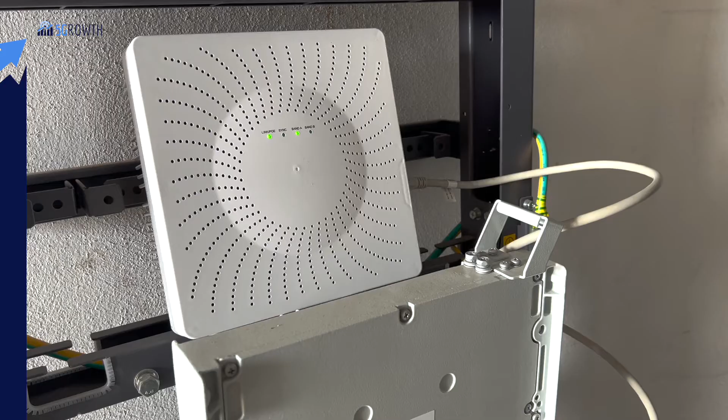The decoupling of these components is one of the differentiating features of the Aveiro pilots. The CU and the DU can be deployed in different locations or can be co-located. The RU is in charge of converting radio signals into a digital stream for transmission over packet networks.

Concerning the user equipment, multiple devices can be used, such as the Huawei 5G CPE Pro 2 used in the Energy pilot. The different components of the radio access network can be managed and monitored to guarantee optimal performance.

The 5G core is based on Fraunhofer FOKUS's Open5GCore. Open 5G core components, including all the fundamental 3GPP 5G core network functions, can be deployed as containers or virtual machines. Open 5G core follows the service-based architecture, in which self-contained, independent and reusable network functions expose their functionality through a well-defined REST interface. The O5GC command line interface enables configuration and monitoring of all the 5G core components.

The integration of 5Growth with 5G-VINNI involves the adaptation of the 5Gr-VS requests to the Sonata Slice Manager. The flow between 5Gr-VS and the 5G-VINNI's network function virtualization orchestrator follows the 3GPP standard TS 28.531.

This integration has allowed the availability of the interdomain and security innovations led by IT Aveiro, also supported in Sonata through extensions implemented on it.

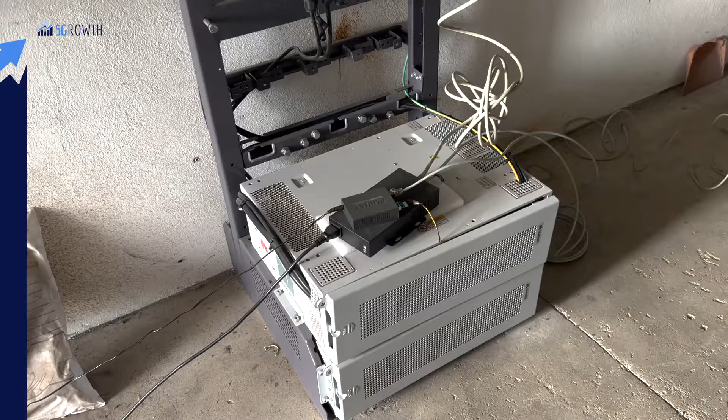The control center system is deployed in the IT Aveiro data center, connected to the 5G core through the data center network. In the first use case demonstration, we'll see what happens when an abnormal event takes place inside the secondary distribution substation.

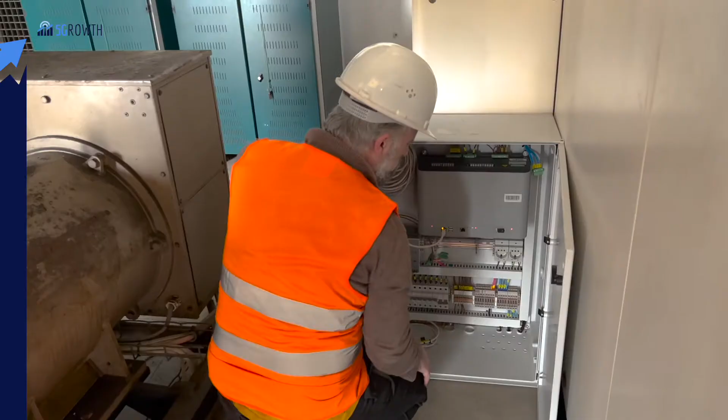For that purpose, we simulate a blown fuse event in one of the low voltage outfeeds, interrupting the current sensor reading. As the current reading is interrupted, a new alarm event shows up in the alarm list interface on the operator's screen.

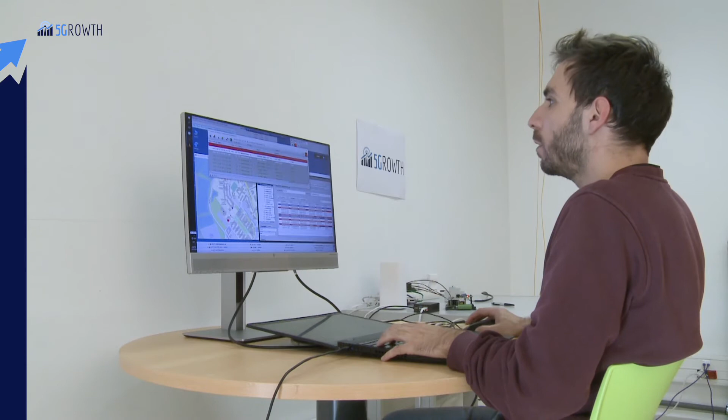Other user interfaces like floating lists or diagrams are also immediately updated with the new status. To ensure a reliable real-time operation of the network and a smooth experience for the operator, a sustained low latency on the communications network is mandatory, not exceeding 100 milliseconds.

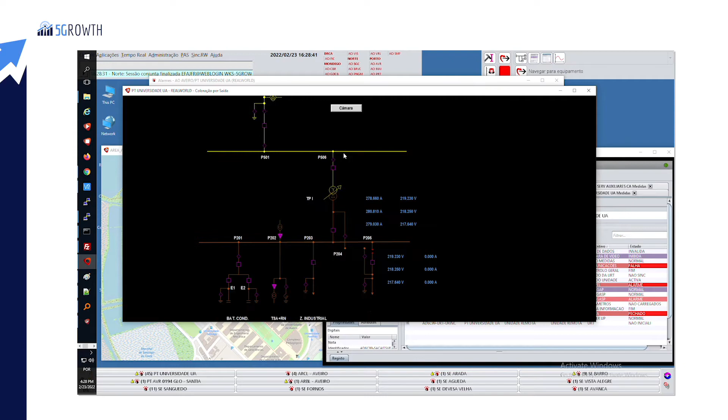The operator will then track down the abnormal event just arrived, opening the single-line diagram of the problematic substation from the alarm list entry. The diagram exhibits a set of real-time live information concerning the secondary substation telemetry, measurements like current and voltage, and signals like a blown fuse or an actuated intrusion detector.

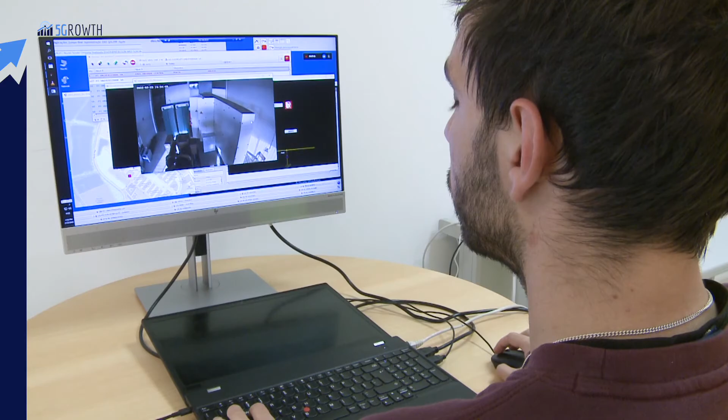The operator may open a video streaming transmitting from inside the substation to get further information about the root cause of the abnormal event. This can be particularly useful to the operator assessing what is going on inside the substation, maybe a fire on the power transformer or a human or animal intrusion.

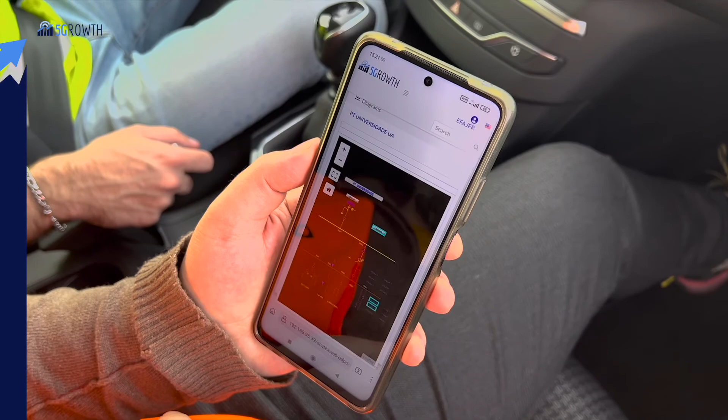He can then pass accurate information to the maintenance team on the field, saving valuable time preparing the intervention to resolve the occurrence. Meanwhile, an incident ticket will be issued and assigned to a nearby field crew to investigate the fault event. The field crew has immediate access to the work order related to the incident using a 5G mobile device connected to the 5G network.

With the mobile interface, the field crew can get real-time information from the secondary substation, such as the telemetry, the alarms, and the live video feed from inside the substation. This information helps the field crew to assess the fault in advance and better prepare to solve it.

The team can use the geolocation of the secondary substation to establish the better route to get there.

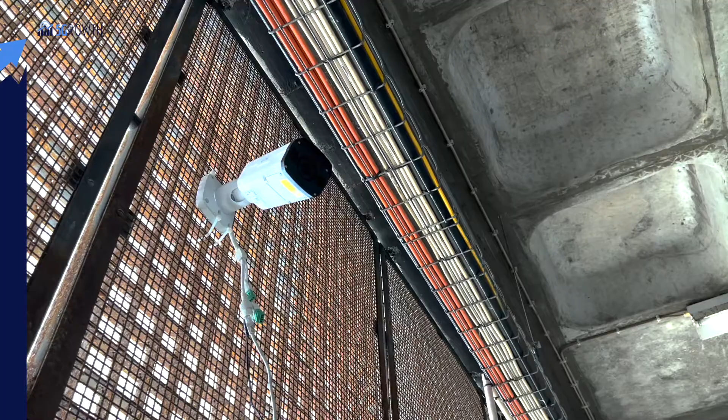When the team enters the substation, the intrusion detector is actuated. The detector signal is acquired by the substation controller and immediately transmitted to the control center, showing in the operator workstation. That blinking door is telling the operator that something requires his immediate attention.

Through the video streaming, the operator can follow the field crew actions while they investigate the root cause of the incident. This enhanced supervision of the secondary substation would not be possible with the communication technology currently deployed in the distribution network across the secondary substations. We are talking most commonly about GPRS, with very low throughput capabilities and higher latency than required for real-time remote operation.

In the second use case, the low-voltage sensors installed in the IT2 building distribution cabinet and in the laboratory electrical switchboard transmit real-time telemetry and last-gasp events to the concentrator inside the substation, which forwards them to the control center. The low-voltage sensors are connected to the substation through the 5G standalone network. These sensors and the concentrator are time-synchronized by the IT NTP server.

The low latency and high availability of the 5G network are key points to keep the low-voltage sensors timely synchronized and to ensure that the last gasp events triggered by the low-voltage sensors are transmitted as soon as they are generated and while these sensors have remaining power.

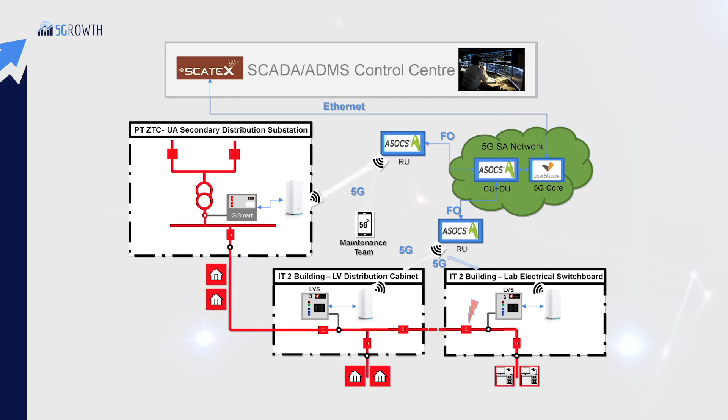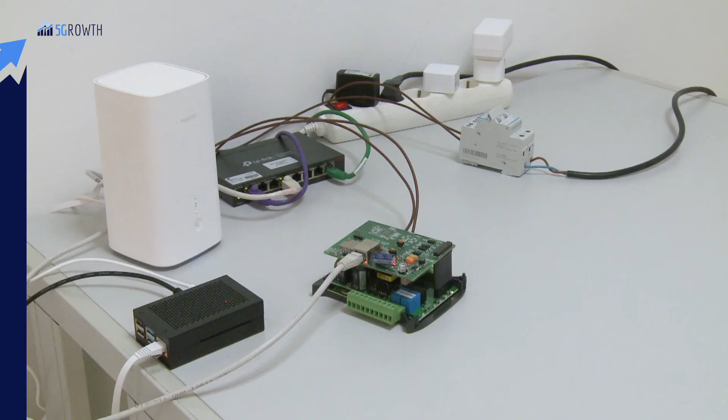In the second use case demonstration, we'll see how a power down incident in the low voltage distribution network is handled and transmitted to the control center. For that purpose, a power cut is simulated, affecting the electrical switchboard and interrupting the power supply of the low voltage sensor installed there. The voltage drop triggers the last gasp signal in the low voltage sensor.

This signal is pushed into the 5G network to be acquired by the substation concentrator and immediately transmitted to the control center over the 5G radio connection.

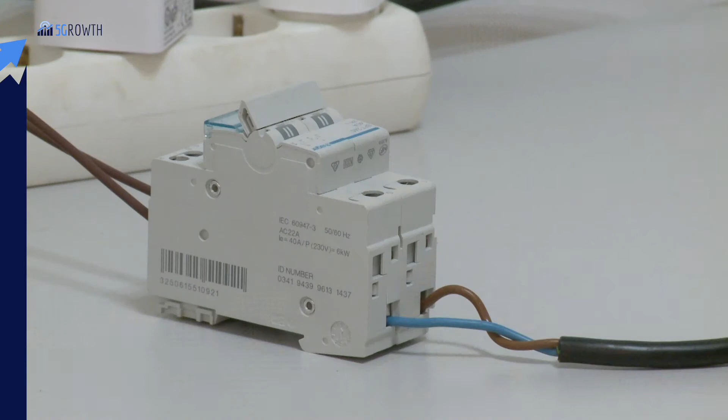We can see that as soon as the power supply is interrupted, a new alarm event shows up in the alarm list interface on the operator screen. Other user interfaces, like floating lists or diagrams, are also immediately updated with the new alarm status and the related telemetry measurements.

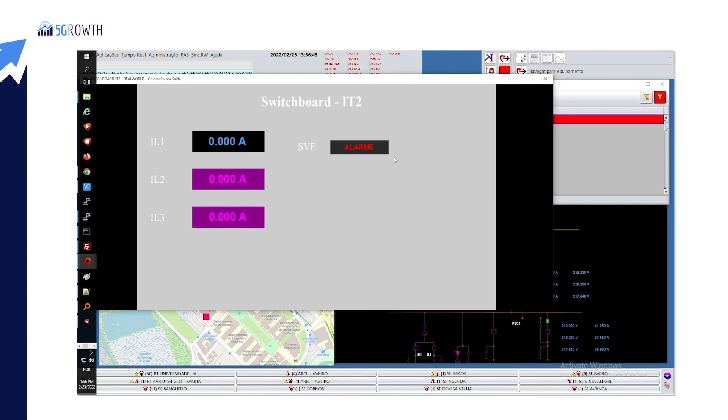The operator opens the diagram of the distribution cabinet close to the electrical switchboard and realizes that this one is still energized. The fault must be in the circuit between the distribution cabinet and the electrical board.

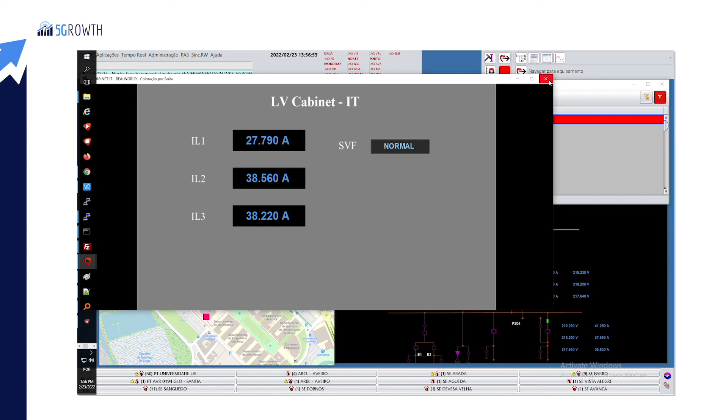A few moments after the fault occurs, the control center operator already has valuable and accurate information to pass to the field crew that will be sent to investigate and solve the problem that led to the fault.

The communication technologies currently in place in many of the metering infrastructures, like PLC Prime or RF Mesh, have limitations that prevent them from supporting large-scale real-time monitoring of the low-voltage network. The 5G provides the performance and capacity to do the job.

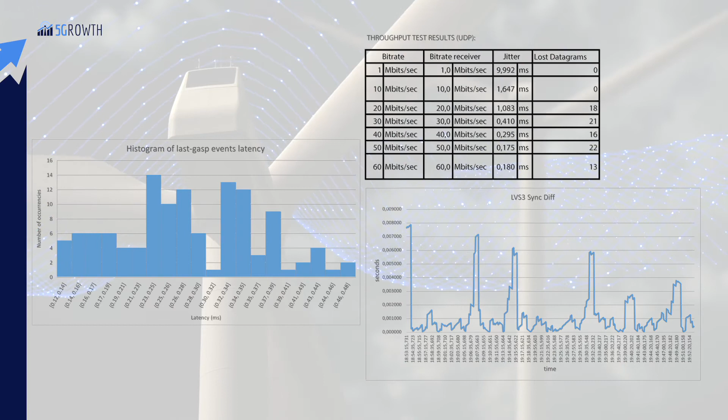Several validation campaigns took place along the project, giving valuable indications to adjust the 5G network parameters to better cope with the use case's requirements. The graphics and tables here presented show the performance of the 5G standalone network in the final validation campaign.

The most relevant core KPI on data rate of this pilot was measured in use case 1. The performances of the field trials of the 5G network at the vertical site to transmit the data flow in terms of UDP traffic between the secondary substation and the control center provided a good video streaming experience.

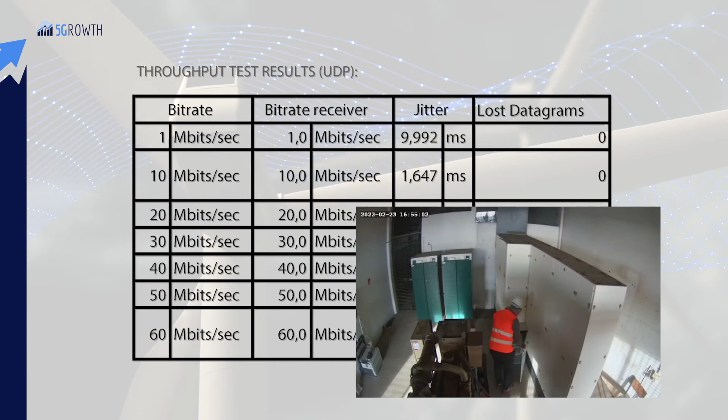During the test period, the service availability was 100% and no packet loss was detected up to 10 megabits per second. The data rate uplink could reach 60 megabits per second.

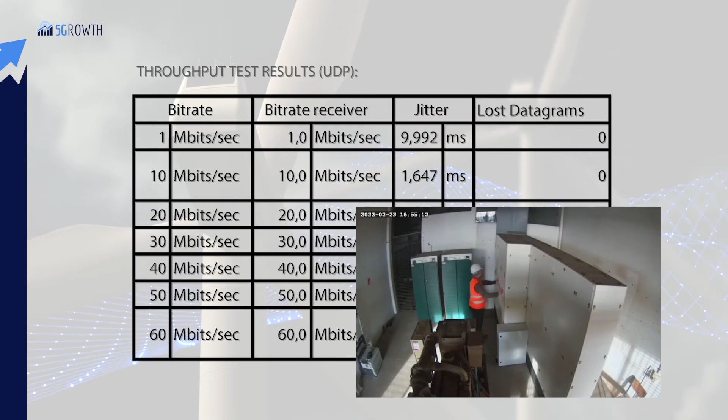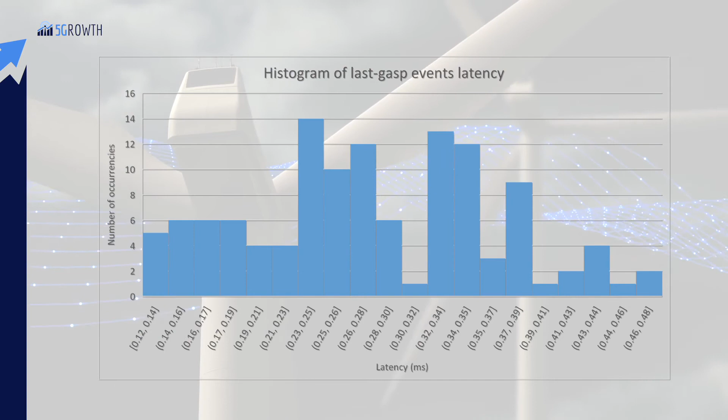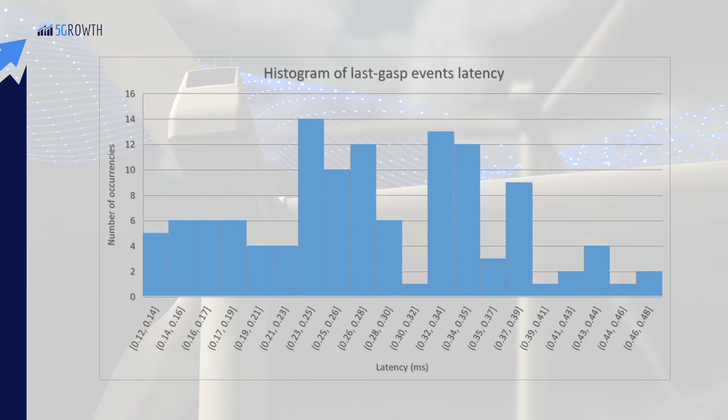The most relevant core KPI on latency was measured in use case 2. The last gasp information, end-to-end latency between the low voltage sensors LVS3 installed in the low voltage network and the G-Smart installed in the secondary substation, was measured directly in the application, which was 27.94 milliseconds on average.

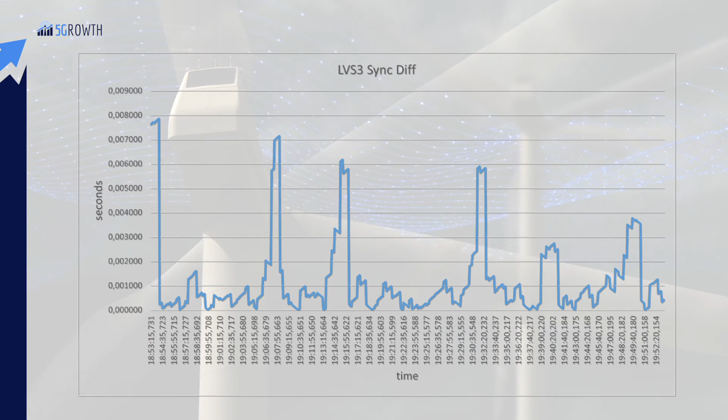The latency in the time synchronization service between the LVS3 device and the NTP server was 13.4 milliseconds average, achieving an average difference of 1.21 milliseconds between LVS3 devices when comparing each one's synchronized time.

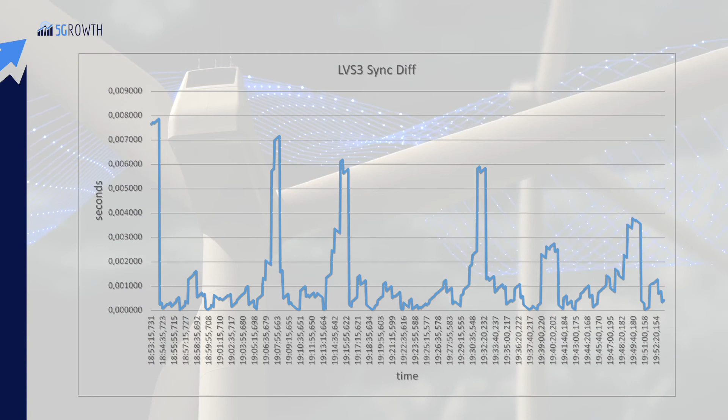The business, functional and technical needs concerning the advanced monitoring and maintenance support for the secondary distribution substation and the low voltage distribution network have been presented, along with the details concerning the implementation and deployment within the energy vertical pilot. A 5G standalone infrastructure was integrated, deployed and configured in the 5 Growth pilot site at University of Aveiro, providing low latency and high data rate, supporting both real-time telemetry flow and video IP streaming requirements.

The Energy Pilot's infrastructure allowed the integration and validation of 5 Growth innovations and their interaction with 5G-VINNI, supported by the 5 Growth stack.

Taking the good results obtained, EFACEC is considering the development of a business case, including the 5G connectivity service as part of the next generation smart management solutions for the low voltage electrical power distribution.